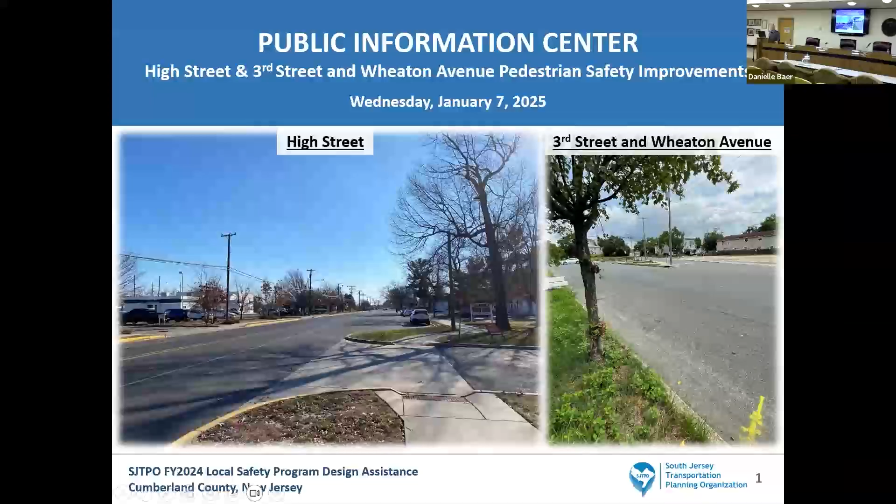To give you a background of where we are with this project, this is a federally funded project, and with that we follow the federal process. Currently we are at the end of what's called preliminary engineering. Following preliminary engineering, we will get our environmental document reviewed and approved, and after that we will enter into final design. We're anticipating, if all goes well, to be in construction in the year 2027.

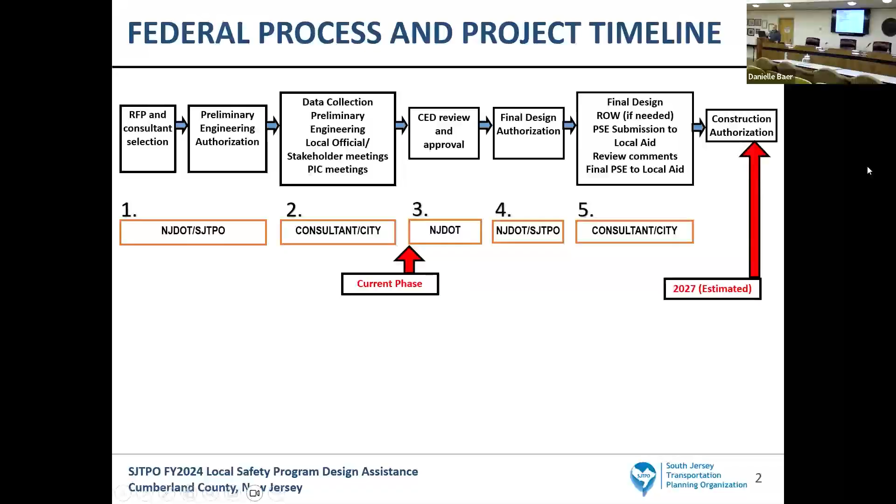There's a question about how long will the construction occur. Probably one construction season, so that's like 6 to 9 months. We're in final design, we'll work on a construction schedule to lay out all that stuff. So that's just a rough estimate.

For the agenda, we'll talk about the project background, the locations of the two projects, the existing conditions, what we're proposing for improvements, and then we'll take any questions at the end.

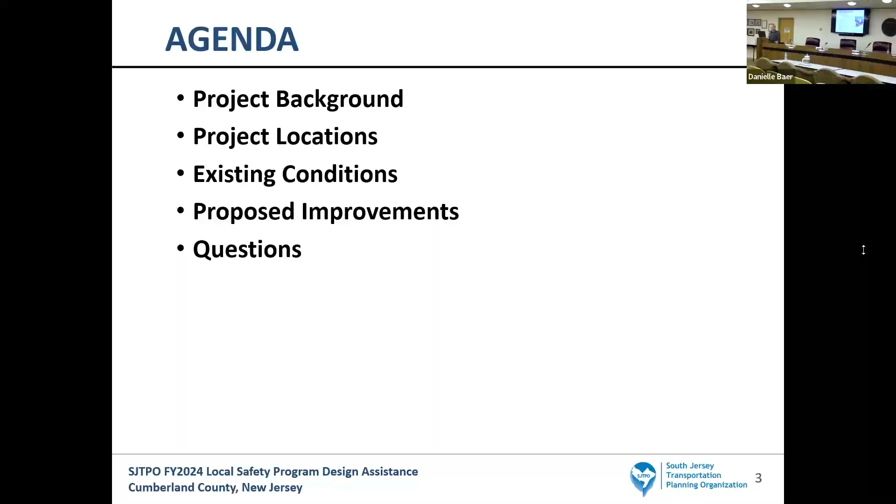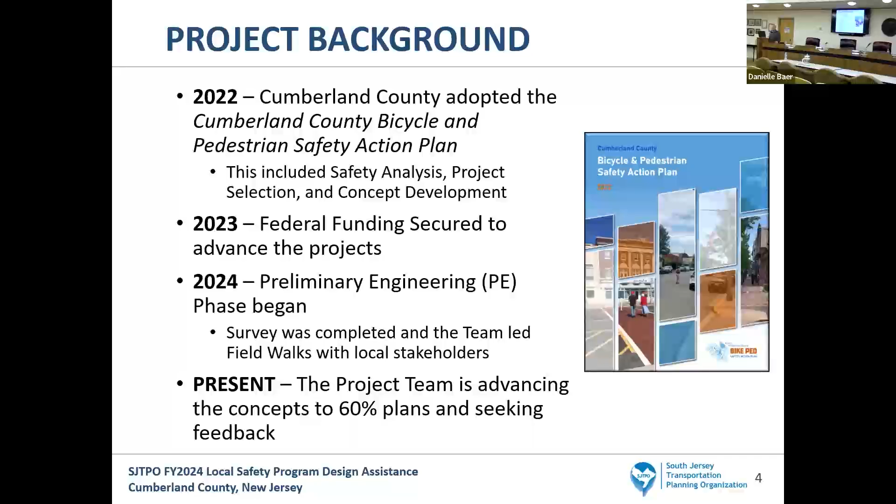The project background: these two projects came out of the Cumberland County Bicycle and Pedestrian Safety Action Plan. In 2022, Cumberland County adopted that plan. This was a collaborative effort between SJTPO, the counties, the municipalities, and their consultants to identify and look at crashes in all the corridors of the county and identify clusters and hotspots. Out of that study came some suggestions and recommendations for some of those problem corridors, and that's where these two projects emanated from. In 2023, the federal funds I mentioned were secured to advance the two projects, and in 2024 the preliminary engineering phase began. As I mentioned, we're currently at the end of preliminary engineering.

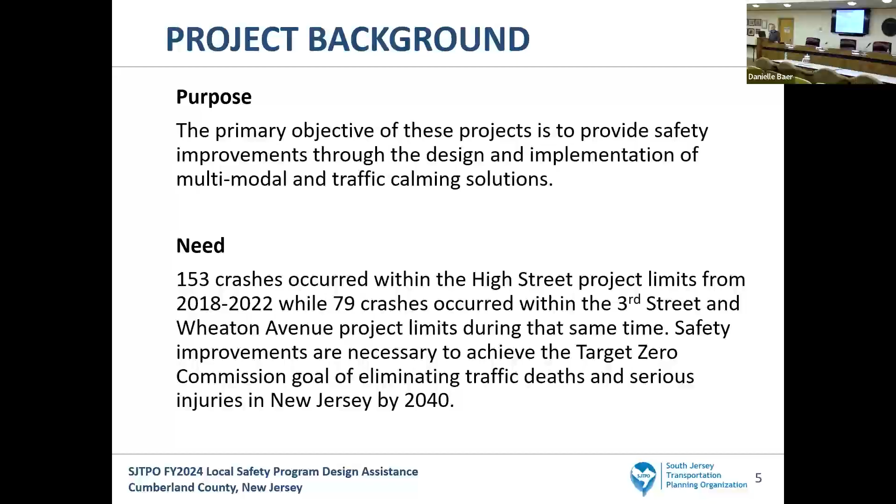The purpose and need of the project: the purpose is to provide safety improvements through the design and implementation of multimodal and traffic calming solutions. The need - I'll get into the crashes a little bit in a few slides - 153 crashes within the 5 years studied on High Street within the project limits between 2018 and 2022, and 79 crashes within the 3rd Street and Wheaton Avenue project limits during that same time. These safety improvements are necessary to achieve the Target Zero Commission goal of eliminating traffic deaths and serious injuries in New Jersey by 2040.

First, we will cover the High Street project. Here's a map of the High Street project corridor. The boundaries are from a little bit past Harrison Avenue, as you can see on the map here, and out on the boards we'll chat about in a sec - Harrison Avenue to Main Street. The corridor is located within the central business district of downtown Millville, and it's very active with heavy pedestrian traffic traversing the corridor to visit popular destinations such as Rowan College of South Jersey Arts and Innovation Center, the Levoy Theater, and the other restaurants in the Glasstown Arts District.

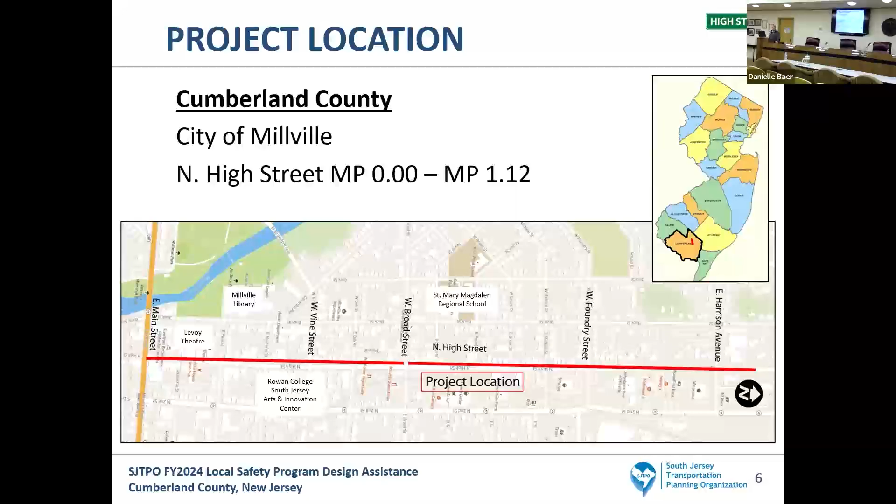For the existing conditions, we took several field walks. Here's some photos, but it is a 25 miles an hour posted speed limit - not everybody goes 25, but it's posted at 25. It's an urban major collector with a 2-lane cross section for the length of the project here.

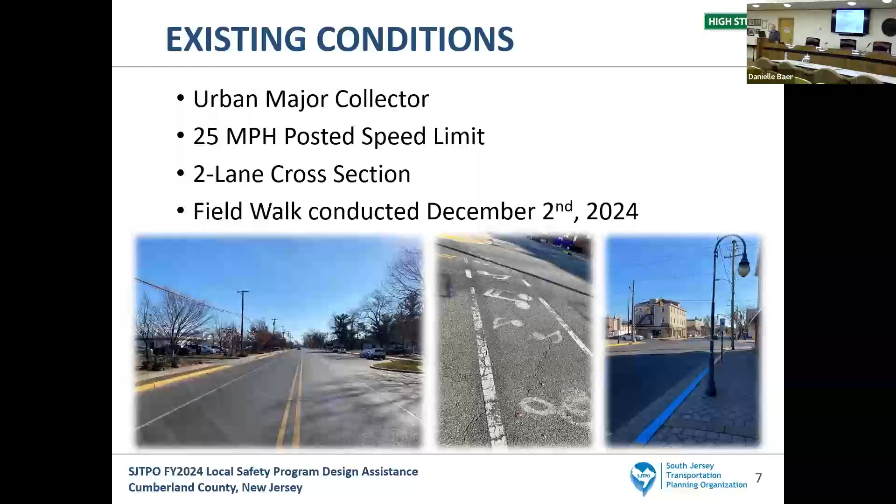As I mentioned, there were 153 crashes during that time period studied in just over a mile of road, 1.1 miles. Of those 153, 8 were pedestrian crashes. For the severities, there were no fatal crashes, thankfully, but there were several injury crashes: 3 suspected serious injury, 15 minor injury, 39 possible injury, and 96 no apparent injury.

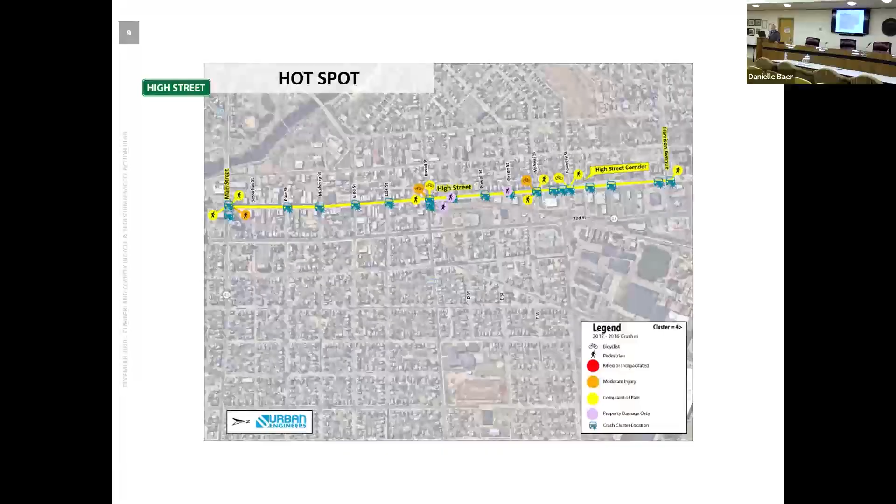The crash types is something we look at when we design safety improvements. So 45% of crashes were right angle crashes, 16% were rear end crashes, and 12% were same direction side swipe crashes.

We found speeding to be the general cause for these crash types. Speeding vehicles increase the possibility of right angle crashes at unsignalized intersections, as we have a lot of these on High Street. As motorists cross or merge onto High Street, they're not given enough time to safely clear the intersection.

So I'm going to walk through the whole project corridor, but here is just a bullet list of some of the proposed improvements.

There will be repaving of the corridor, ADA and curb ramp improvements, and under that heading will be curb extensions, which I'll get into more in the next slide. There will be some drainage improvements as we change the curb lines, and we'll have to update the drainage that goes along with that. We're going to refresh the signage and striping to make sure they're all up to MUTCD code. There won't be any right-of-way takings here, only temporary easements to accommodate driveway construction and tie everything in.

We don't anticipate utility relocations for High Street currently, and we'll also have lighting improvements at pedestrian crossings. Where pedestrians are crossing, we've evaluated the lighting levels and are recommending adding LED lights to the crossings, mainly on existing utility poles.

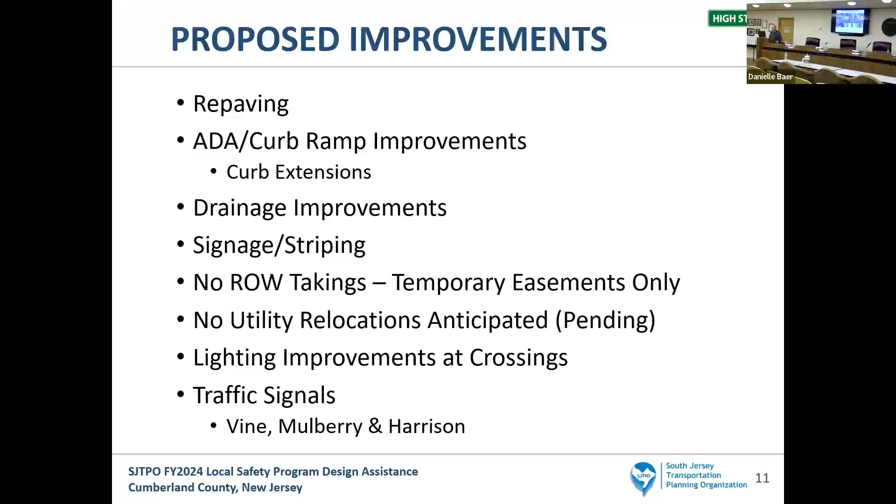So we'll start on Main Street and I'll just walk down the corridor here for everybody. You'll see the repaving and the parking. We'll have raised pavement markings throughout the job, high visibility crosswalks, and these curb extensions.

Basically, this black line is the curb that gets bumped out and extends the sidewalk. Curb extensions increase the visibility for both drivers and pedestrians while reducing the distance needed for pedestrians to safely cross High Street. When placed at the entrance to a corridor, curb extensions can also serve as a gateway treatment, indicating to motorists that there is a slower speed limit within the road segment.

Also, curb extensions reduce the radius of the curb, which causes vehicles to turn more slowly around corners. So that's another improvement for pedestrians.

In other words, in the existing condition where my mouse is now, if pedestrians were crossing from here with these parked vehicles along here, a car may not see a pedestrian until very late. But with these curb extensions, it brings the pedestrians closer to the traffic. The sight line is better for both the pedestrians and the drivers, and it reduces the amount of crossing distance they have to cover as well.

This is an example, and it's kind of hard to see on that screen, but this is a job that we just recently did in Somerset County that had a lot of curb extensions, and it's working out really well—a similar pedestrian improvement project.

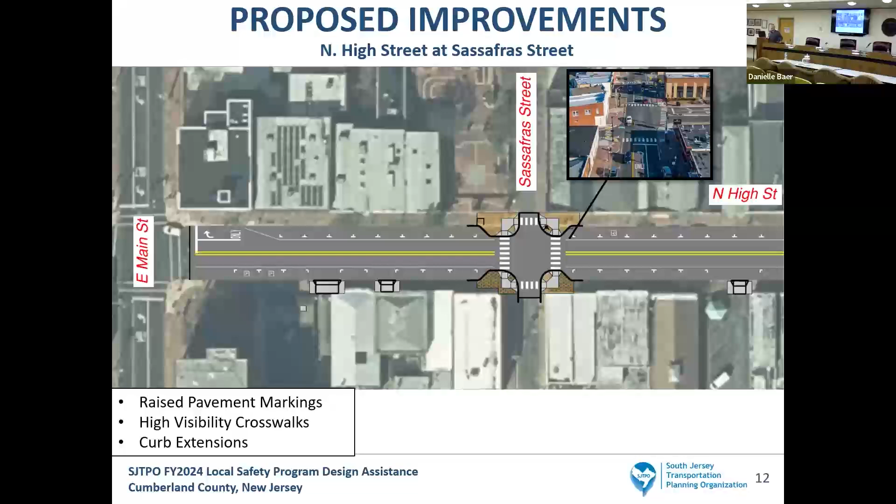Heading down the corridor here, there's the Levoy, here's New Pine Street, and similar curb extensions here. I'll point out the high visibility crosswalks I mentioned. This is what you typically see at intersections for crosswalks, but high visibility crosswalks are these bottom two types. These crosswalks use patterns that are visible to both the driver and pedestrian from farther away compared to traditional transverse line crosswalks, so there's an added safety benefit for that as well.

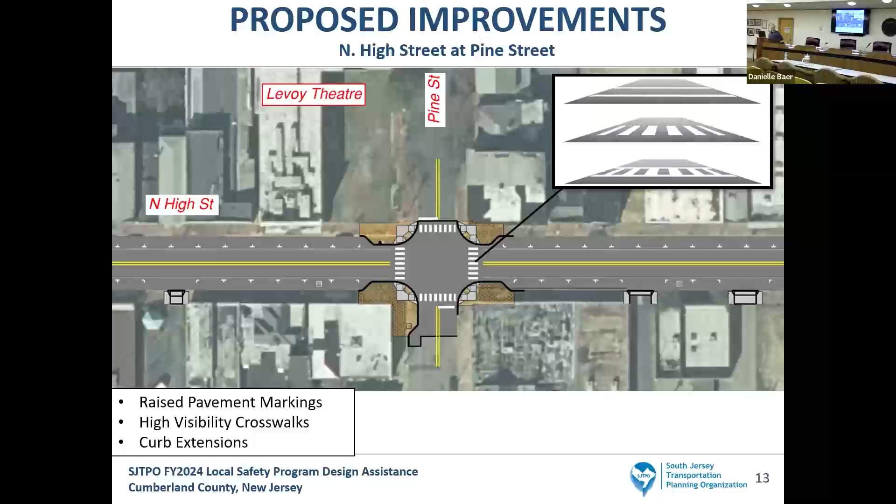Two signals I mentioned earlier, Mulberry Street and Vine Street. Mulberry is the existing signal, and Vine Street is the new signal. As I mentioned, we did a traffic warrant analysis, and when we looked at all of the crashes over that time period, it did warrant a new signal at Vine Street. You can also see the curb extensions incorporated with the signals.

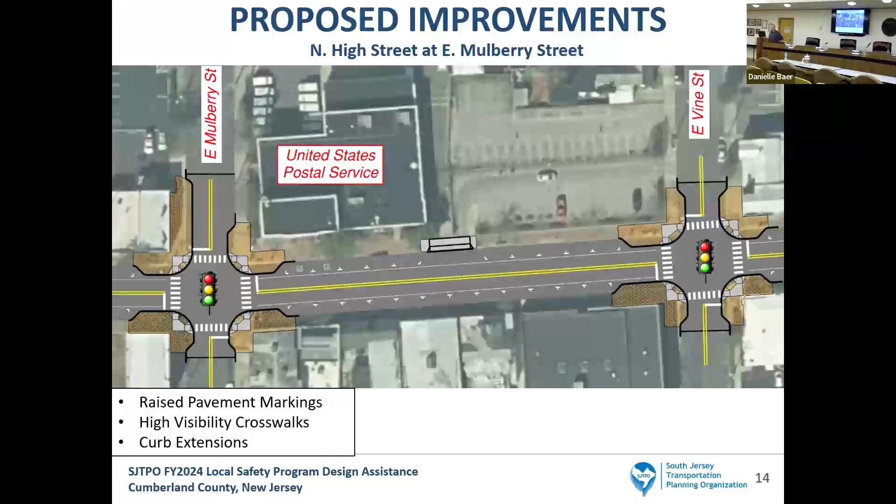Heading to the north, Oak Street, much of the same here with the curb extensions. I'll mention too that some of the driveway reconstructions will make these ADA compliant, and those will be throughout the corridor as well.

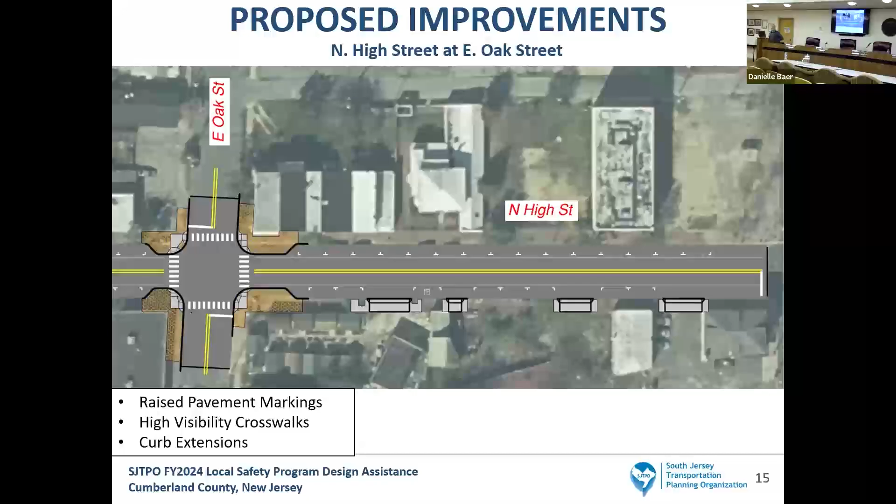Heading north, is that showing up okay? Yeah, so heading north, we're installing a mid-block crossing between Depot Street and Powell Street.

This is called an RRFB, a rectangular rapid flashing beacon. You can see the picture of the guy—it's a push button that you push and it activates the amber lights so that you can cross, and it highlights to drivers that they have to yield to pedestrians at that crossing. RRFBs can reduce pedestrian crashes by up to 47% and increase motorist yielding rates up to 98%, based on studies.

Also here, you can see the curb is actually taken in—this is a mid-block curb extension. Curb extensions can also be applied mid-block to slow traffic speeds and add public space, plantings, or grass. When utilized as a traffic calming treatment, these mid-block extensions, also referred to as pinch points or chokers, can reduce traveling speeds by up to 4 to 5 miles per hour and encourage driver attention to other roadway users.

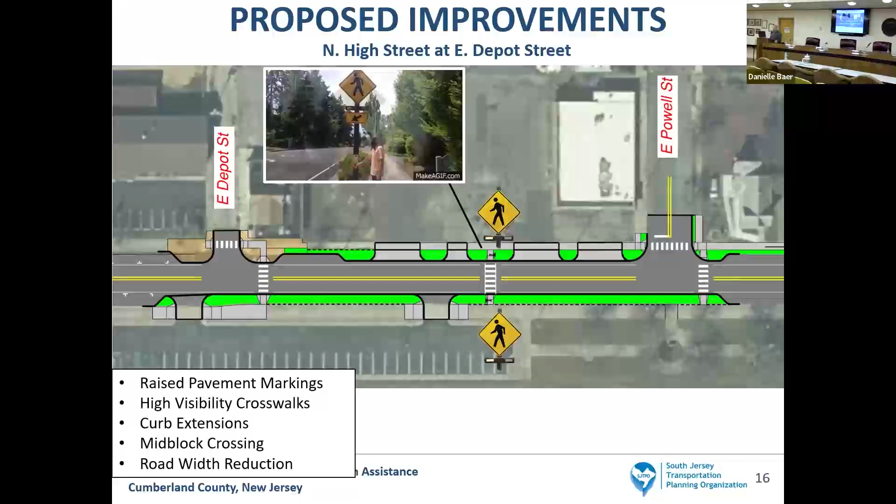Green Street and McNeil Street have similar curb extensions for the crossings.

I'll touch on this—Foundry Street. North of Foundry Street, the existing section is around 72 feet in width, almost double the width of the rest of High Street. This oversized section extends from Foundry Street to the intersection of High and Sharp Street. Oversized roadways tend to create negative impacts, such as cars traveling at excessive, dangerous speeds—drivers see more pavement and think they can go faster. We're proposing that the roadway be repurposed to reflect its size and function, commonly referred to as right-sizing the roadway.

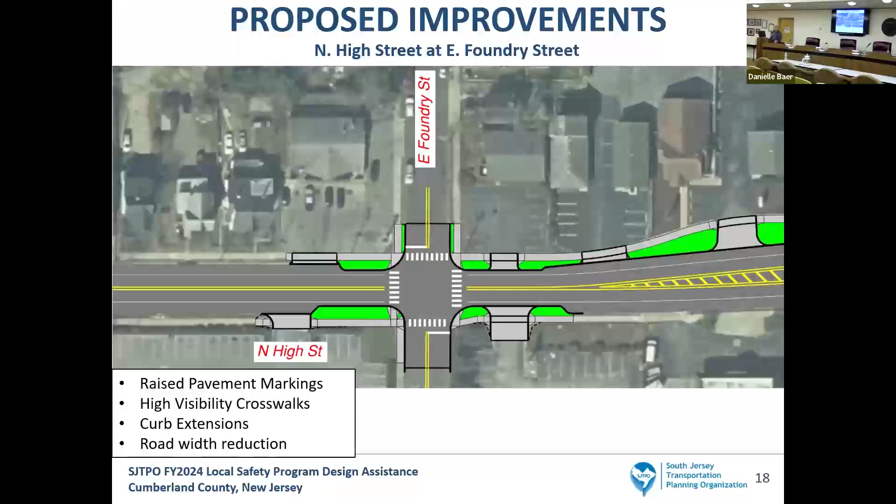The right-sizing continues here, where we repurpose some of that extra pavement. This wide section of High Street currently functions as a 2-lane roadway. It was previously designed and built for 4 lanes, but it only functions as 2 lanes currently, and it only needs to be 2 lanes from a traffic perspective. With simple restriping, the roadway can be repurposed to function more efficiently and safely, taking advantage of the unutilized pavement with a center left turn lane, roadway shoulders, and parking.

This image shows where the existing pavement is versus where the curb will come in on the north side. It's still able to accommodate a shoulder, parking, a 2-way left turn lane, and 2 lanes of traffic. I might also mention less flooding, because less pavement means less impervious surface.

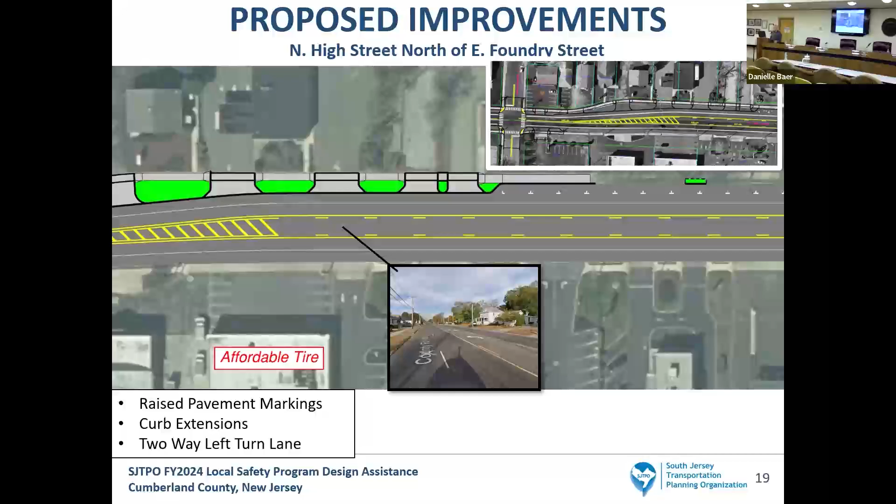We traverse north to Harrison Avenue for this existing signal. We're able to add left turn lanes on High Street at the Harrison Avenue signal. Also, because of that wide distance for pedestrians to cross High Street, we'll be installing bump outs and curb extensions there to reduce the crossing distance I mentioned before.

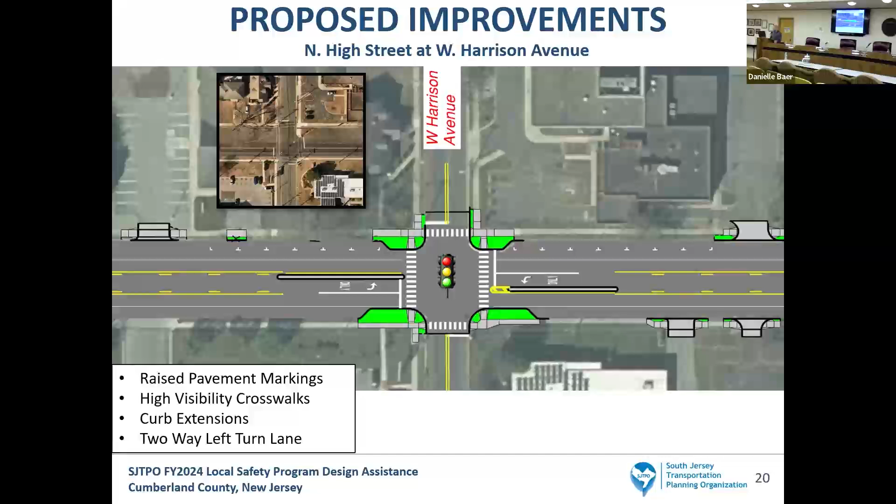The 2-way left turn lane terminates here just south of Elizabeth Street, and our project ends at this location for High Street.

All right, so now we're going to take a breath. I'll get a sip of water. We'll talk about Wheaton Avenue and 3rd Street. Okay.

We're going to present on the 3rd Street and Wheaton Avenue project, just to the south—or east, I guess—of High Street. The 3rd Street corridor project boundaries run from Main Street to Wheaton Avenue, with my pointer back here, and it also encompasses this portion of G Street and Wheaton Avenue from 3rd to G Street.

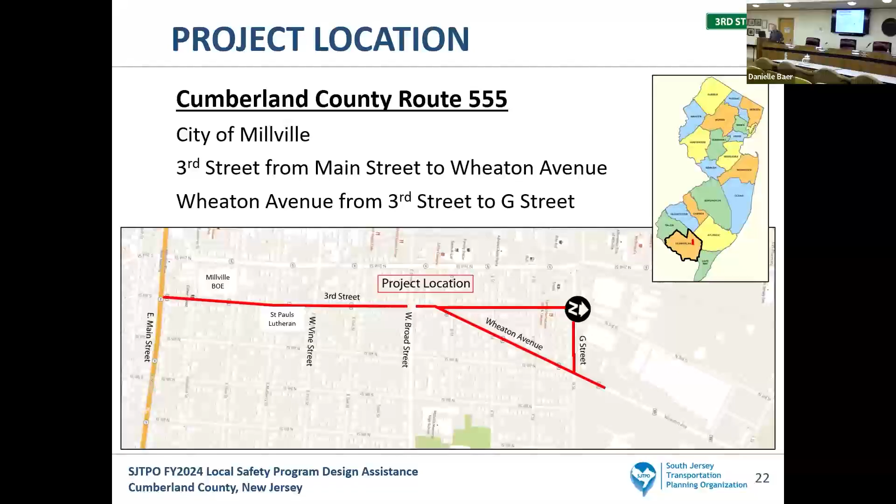The existing conditions: it's located within the Center City neighborhood of Millville. This neighborhood is the residential core of the city, with a few commercial locations but mostly residential. Residents often walk or bike to High Street in this location. It's a 25 miles per hour posted speed limit with a 2-lane cross section.

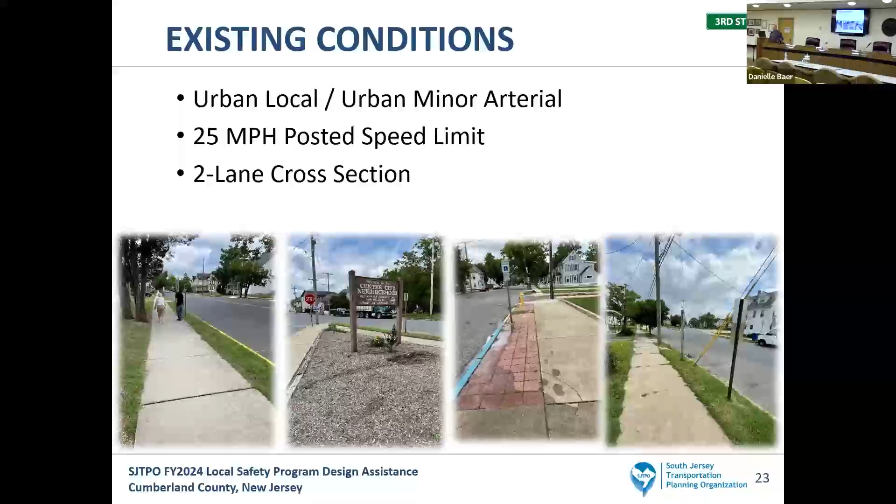Some photos from the field walk.

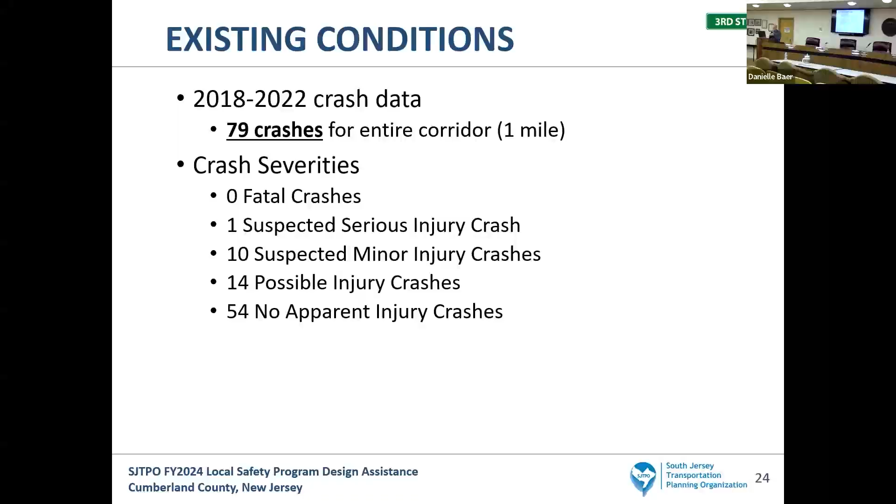So the crash data I mentioned before, there were 79 crashes during the time period we looked at. For severities, thankfully there were no fatal crashes. However, there were several injury crashes: 1 suspected serious injury, 10 suspected minor, 14 possible injury, and 54 no apparent injury crashes. As for crash types, over half, 55%, were right angle crashes, and 15% were rear end crashes.

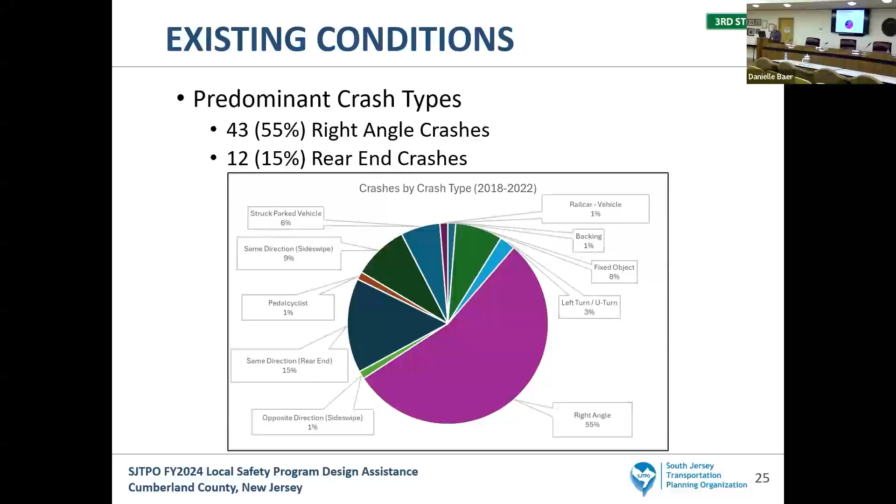So the proposed improvements, some similar to High Street, some a little different: repaving will occur within the project limits, ADA and curb ramp improvements with curb extensions will also take effect here, along with drainage improvements, signage and striping. There's one partial right-of-way take where the traffic signal is, and limited utility pole relocations. There are also some traffic circulation changes I'll discuss in a couple slides, and the signal at G Street and Wheaton will be redone. We'll show that in a slide as well.

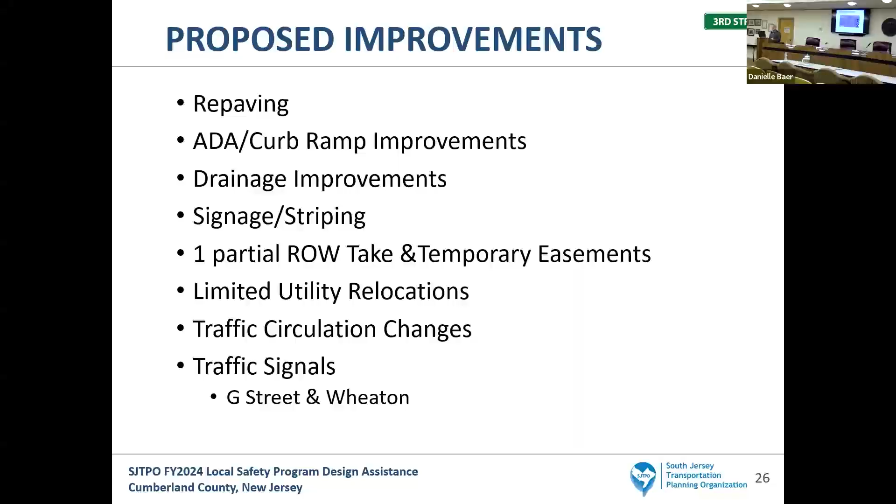These intersections are at acute angles, and roads intersecting at acute angles require extensive turning roadway areas and tend to limit visibility for cars. It's hard to see when you're at a stop sign and have to really crane your neck. Acute angle intersections force motorists to perform large turns in order to determine when it is safe to maneuver. Realigning roadways that intersect at 90 degrees increases the overall safety of the intersection, slows cars down, and increases visibility for motorists and pedestrians as well.

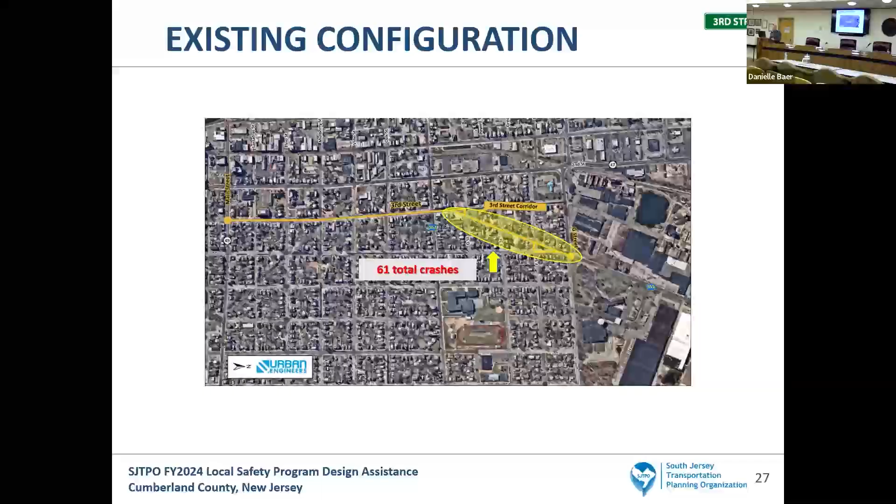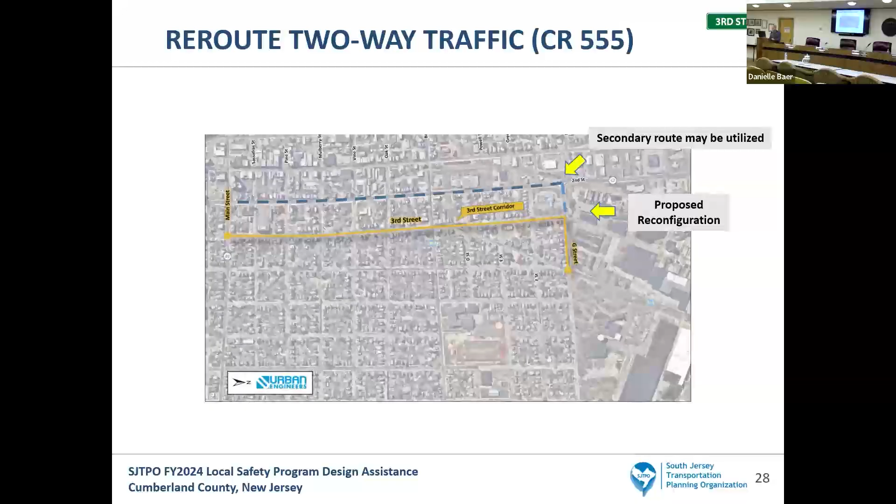So this project proposes to reroute through traffic headed towards Wheaton. They're rerouted to G Street, then up G Street, then a left on 3rd Street for through traffic. A secondary route that may be utilized is Route 47. And Wheaton Avenue would become a local traffic one-way, as you can see here with the arrow.

In this proposed reconfiguration, Wheaton will function as a one-way road serving primarily local traffic, so there will be less traffic traveling at lower speeds. Motorists traveling across Wheaton will now only need to consider traffic coming from one direction, not two, which will greatly decrease conflict points between vehicles and reduce the traffic volume that cuts through the street grid on Wheaton.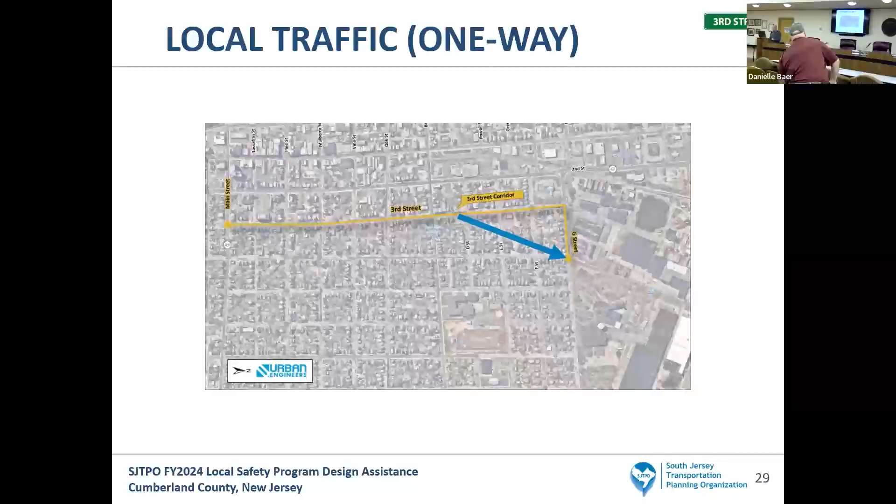So at the top here is the D Street triangle, where 3rd Street intersects Wheaton. Currently this intersection provides traffic circulation in all directions at every approach, creating a large number of potential conflicts between all the cars making these movements. To improve safety within the corridor, realigning the angle of the intersection closer to 90 degrees is proposed. This reduces the speed of turning vehicles and calms traffic along Wheaton.

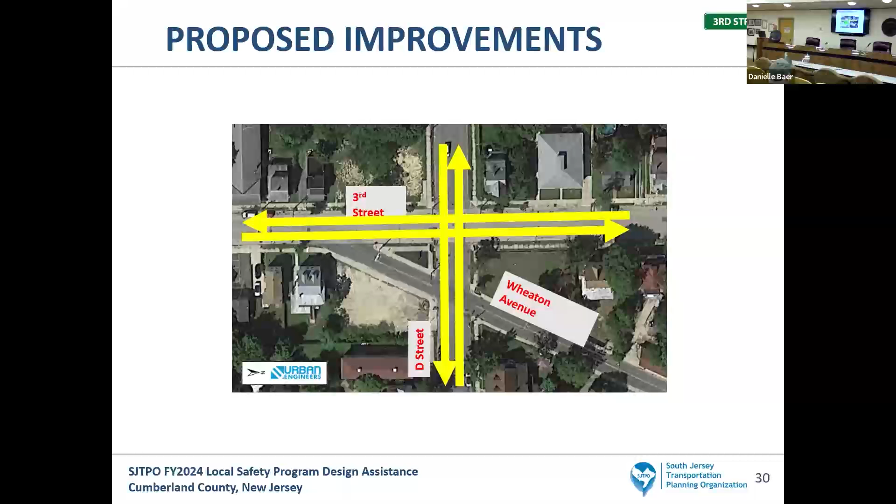So you can see all the conflict points that could happen in that short area by simply teeing this up and having Wheaton as a one-way local road, we reduce a lot of the conflict points. In addition, converting the two-way traffic to one-way will dramatically decrease the number of conflict points, improving traffic safety and operational concerns.

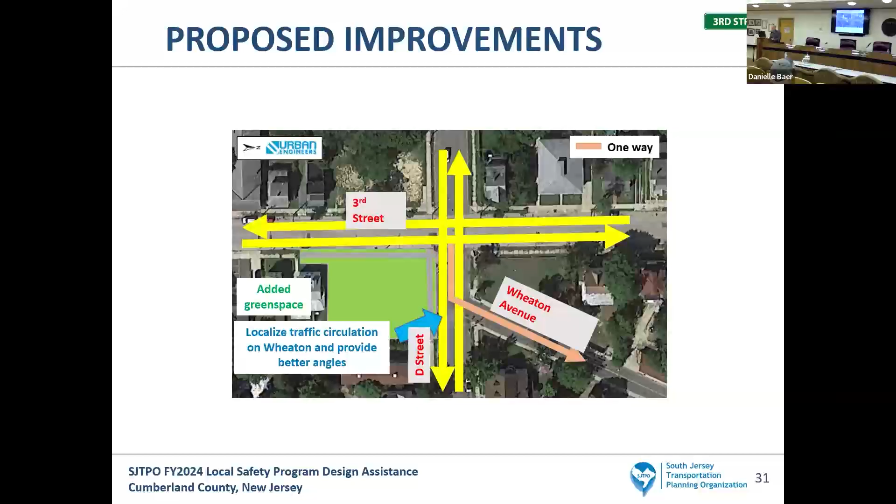So now, we have some boards over there for Third and Wheaton as well. We can discuss that, but I'll just go through it on the slides for everybody virtually as well.

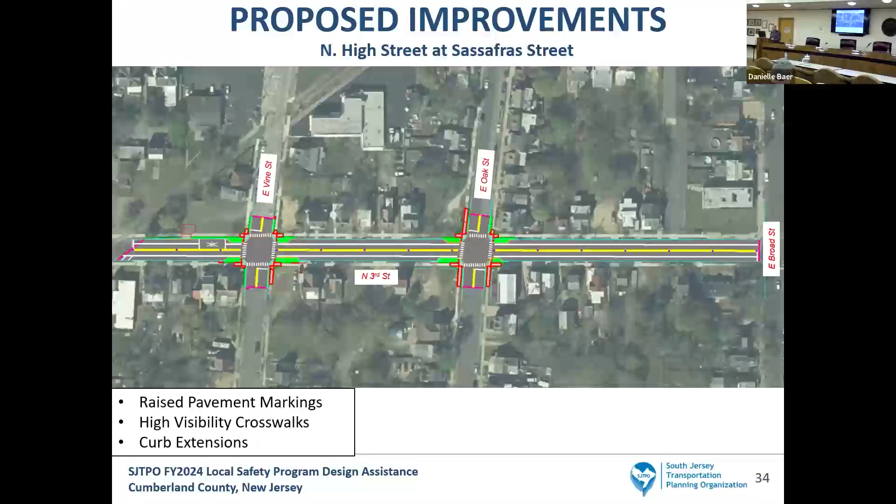We'll also be doing raised pavement markings and high visibility crosswalks, as mentioned for the High Street corridor, so I won't describe those again. Heading past the train tracks to Vine and Oak, similarly we'll have raised pavement markings, high visibility crosswalks, and curb extensions. Our project has a gap at Broad Street, where the Broad Street project actually takes over and our jurisdiction ends on the other side there.

One thing I wanted to mention at G Street - we're sending cars from the Wheaton intersection with G Street up and then to the left on Third Street, that would have been using Wheaton Avenue. As part of that, we're adding a left turn lane. We looked at a signal warrant for this with the added traffic, but the volumes would not warrant a traffic signal here, though we are doing some improvements with curbing in this left turn lane.

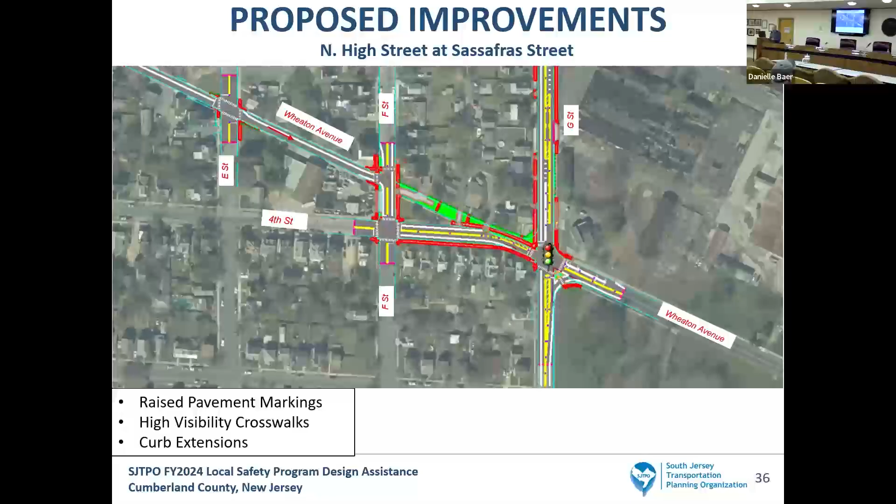This is the bottom portion here at the signal with G Street. I'll zoom in a bit more. So people coming down to Wheaton here, they would come down to 4th Street and then continue on to Wheaton this way. At the signal at Wheaton, there's a left turn and a right turn lane. Traffic that wanted to go through will now head up towards 3rd Street, come up G, and make a left on 3rd.

One of the decisions made was to not force all of that traffic coming on Wheaton onto 4th Street, since it's a local street with local residents. So this is right turn only and left turn only. Traffic would, if they wanted to go left, just make a left, go to 5th Street, and then come back up here.

Also, there's a zoom in here of this difficult right turn lane to head onto Wheaton. There's going to be a right turn slip lane that will be constructed and widened at this location to make this right turn easier for vehicles.

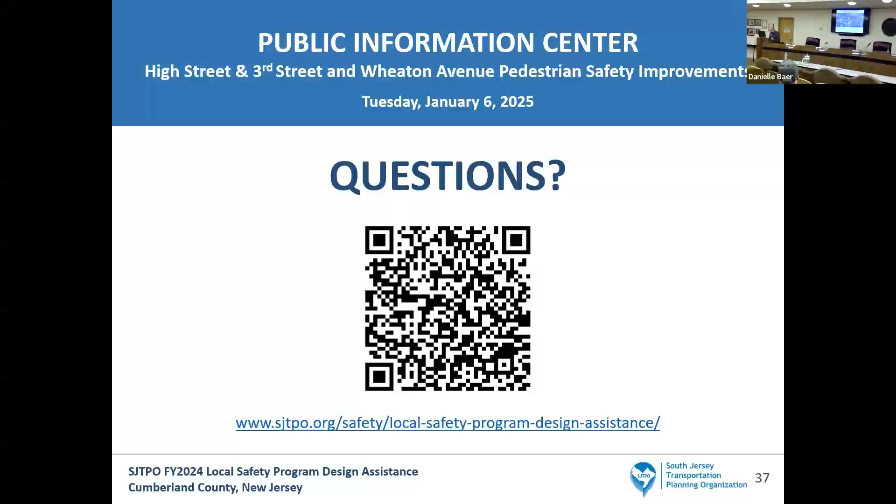On Wheaton Avenue between D and G, are there going to be sidewalk improvements or curb improvements? On Wheaton, between D and G? That's down here. So on Wheaton Avenue? Yeah, on Wheaton. Let's look at the board - do you have the PDF of the whole area?

If we don't have it, we could always add it too. But yeah, after, we'll walk over there and take a look.